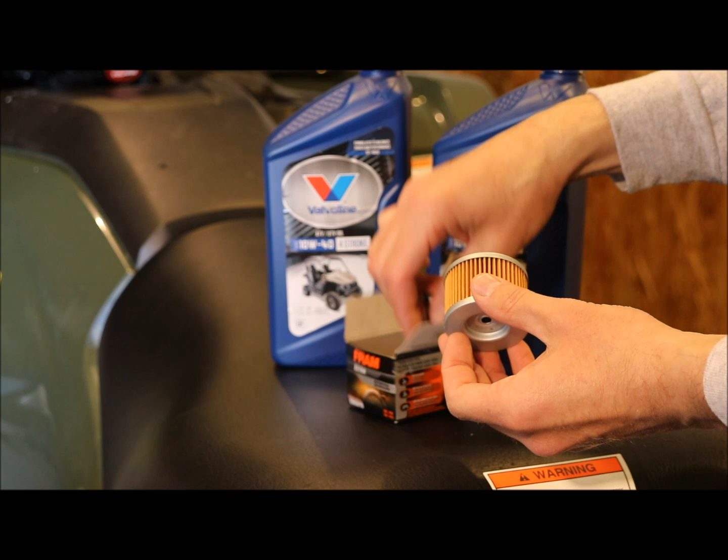I know this little tiny Fram filter here, this CH6015, was like $6. It says made in China. That's what the filter looks like, and it comes with the O-ring, which I'm assuming is for the cover that goes over this filter. I know you can get a K&N filter too for that setup, but those weren't easy to come by, so I didn't. I don't know if the K&N comes with the outer O-ring or not.

So yeah, let's start getting this thing tore apart.

Alright, so first thing I'm going to do, since it's been sitting out in that shipping container over the winter and I don't know how much the battery is charged, I'm going to pull the seat off and the back cover off and hook a charger up to it. The seat, there's just a little lever you lift up here, and that pops off.

Then to access the battery, let's see if you guys can see what I'm talking about. There's a little compartment back here, you're going to want to flip that up, and this comes down. This is your compartment, and then this area here just slides forward, and your battery's going to be right down in there. So let me go grab the charger and we'll get that hooked up.

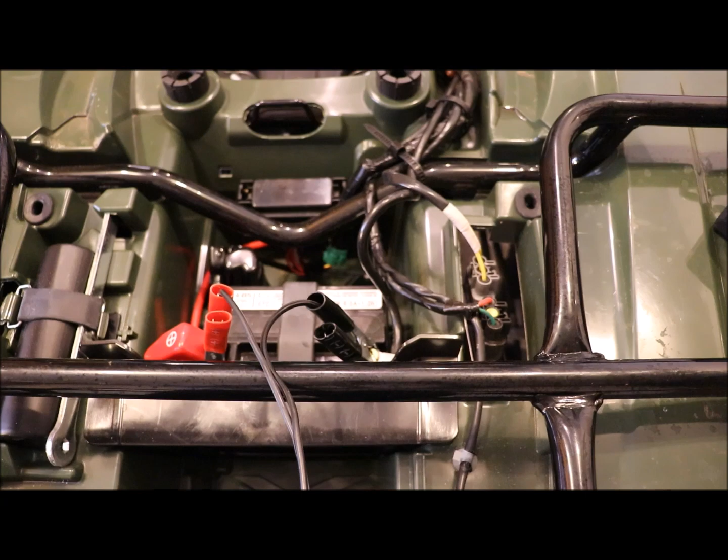So here's a better shot. You can see the battery is right down in there, and all I got on here is just a 1.5 charge, so it's taking charge right now. It's just a 1.5 amp slow charge or whatever. So we'll let that charge, and then we'll hop into the rest of it.

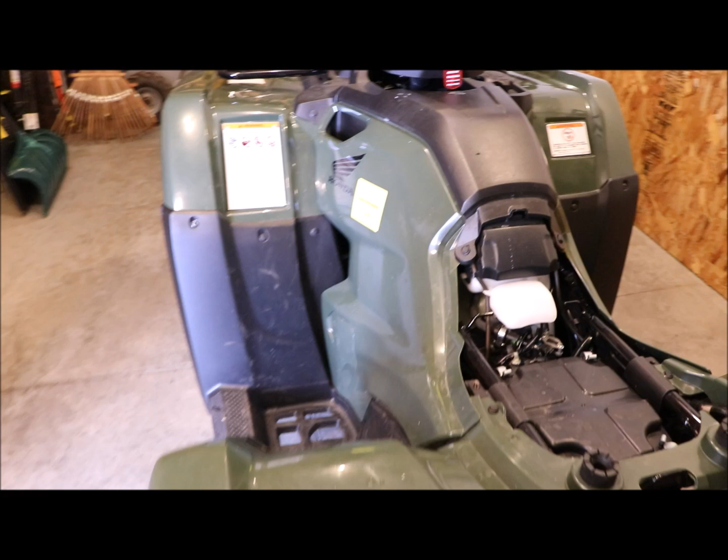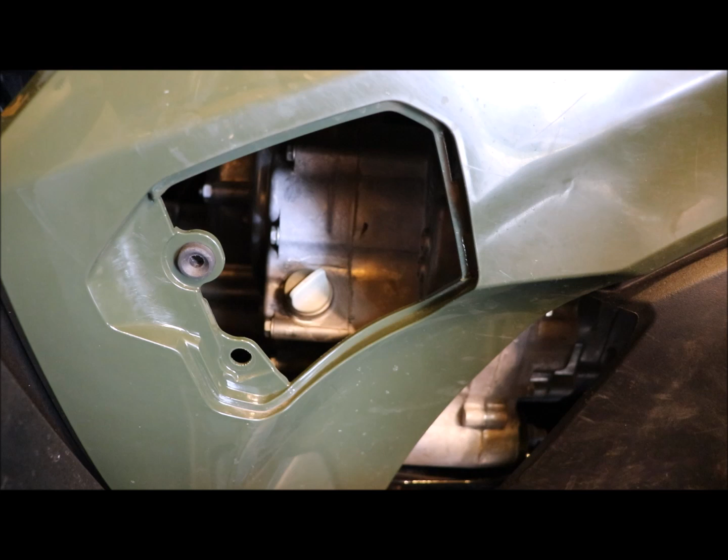I'm assuming to access the oil stuff, we're gonna have to pull these panels off. The engine is in there somewhere, and for checking the oil it has this little icon here on this cover that gets you to the dipstick and the fill. But yeah, I think we're gonna pull the covers off.

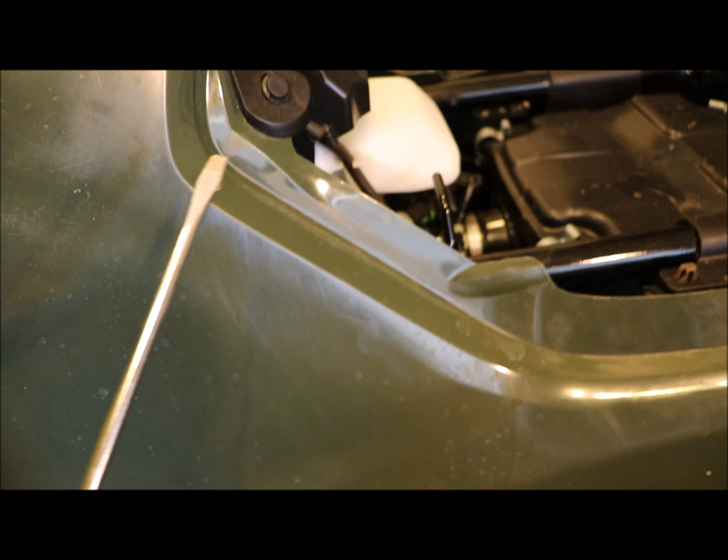Alright, so to pull the panel off, it looks like we're going to have this little clip here that we got to deal with. And what I'm using is just a straight blade screwdriver, a 3/16 tip. I'm just going to slide that underneath here and kind of work that clip up so that it releases.

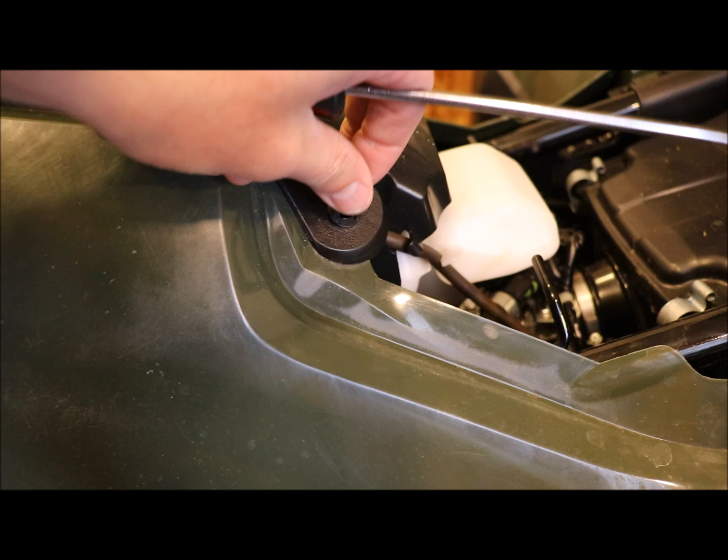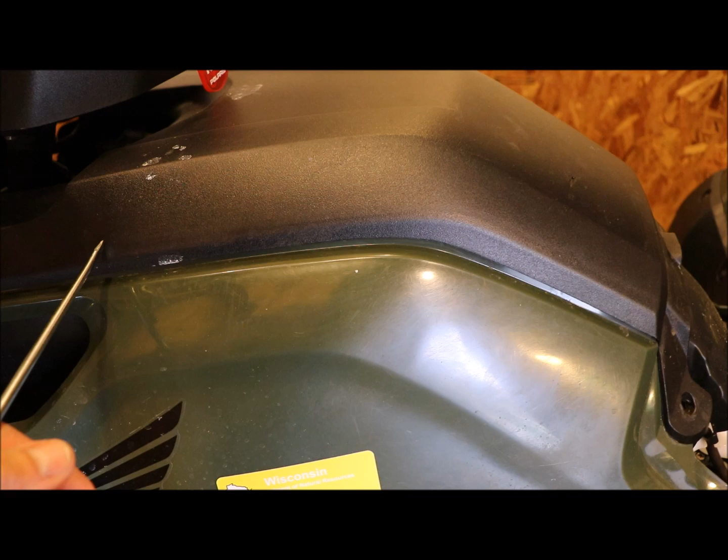But once it's up like that, it should just pull out together. There, that's what it should look like when you get it out. And then I don't know if this top panel just has push fasteners that you can pop up and then this comes out, or if this comes out all as one piece.

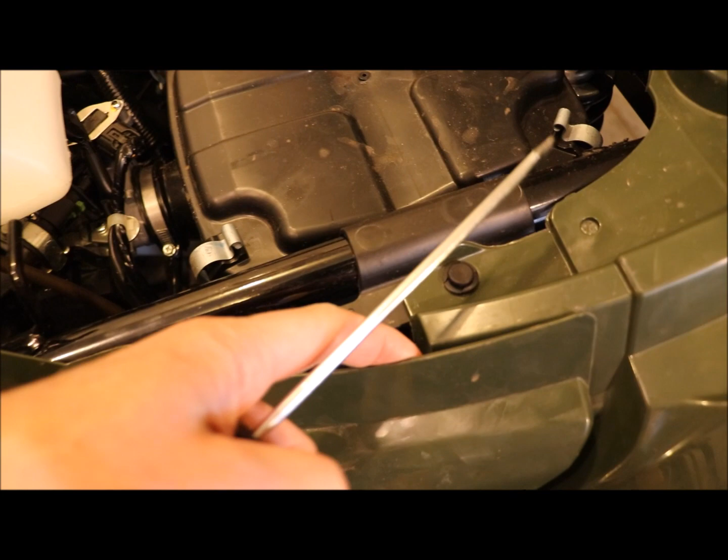Yeah, this one we won't need to take out because this is on the back side. So let me get the camera set up on the tripod here and we'll see if we can break something.

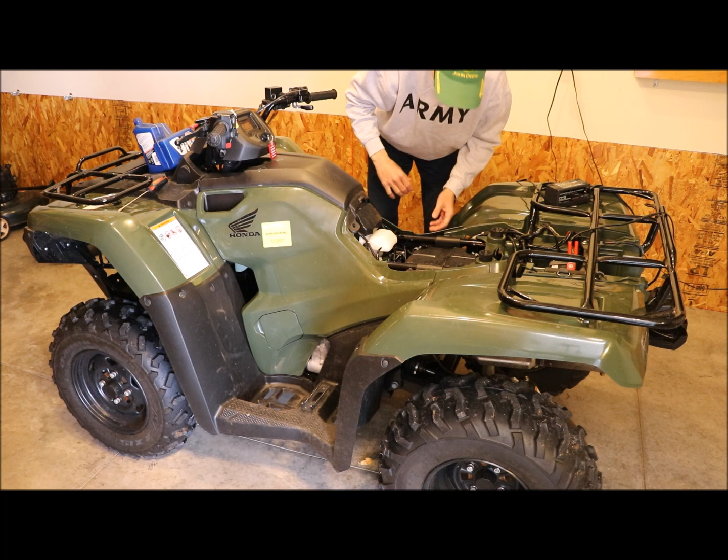Alright, so the way it looks, that top part doesn't come off. This looks like this whole assembly comes off together. And you can see down in here there's a tab that comes up, and then there's just some push fasteners, so I'm going to kind of pull on those. It seems like it's coming.

It's a good sign. Come back to this side, kind of the same thing. It's like a push fastener down right back there, and then there's a little tab that sticks up. We can see that once this is off.

That should be it then. So it looks like there's a push. Okay, so it's off. Yeah, so that's all one piece. This is one piece, you can't get this off.

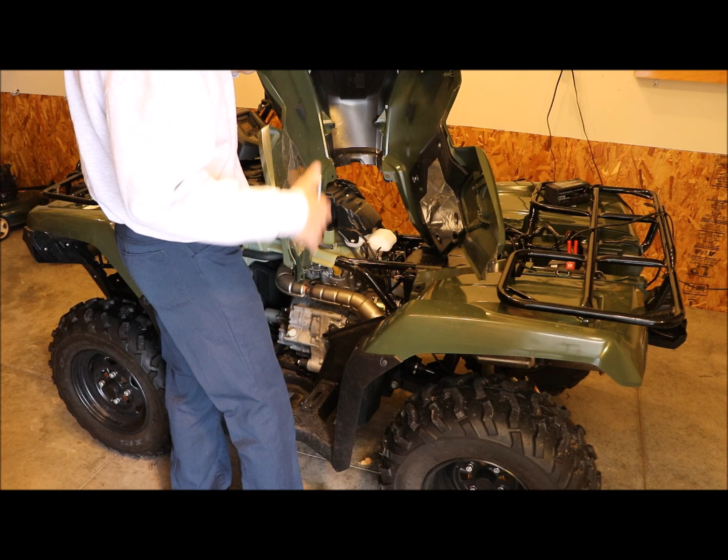I don't know if this is a different Honda design, if you can see it or not, but those same push fasteners are underneath here. There's no way of getting to that unless you pull the whole thing off. So you couldn't take it apart now, they've got it screwed in here. So that's how this is supposed to come off, all as one piece. I guess that's kind of a different design.

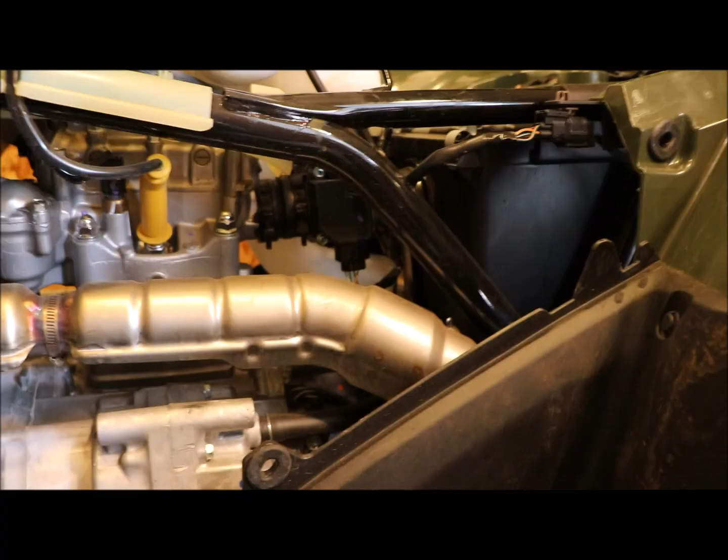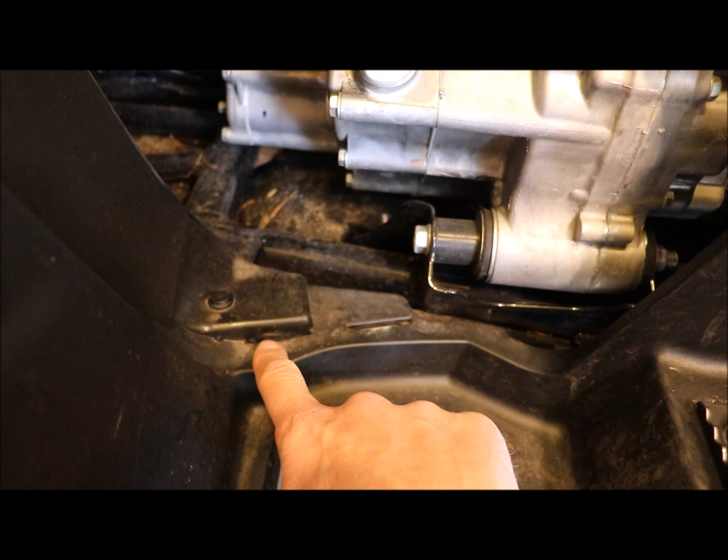So here's what I was talking about. There was a push one here. Here's where that tab comes up and there's like a slot that kind of holds that panel in. Run it down, there's another push in here. And then right in here there's some slots where these two tabs kind of hold in there. And this would be that top black cover.

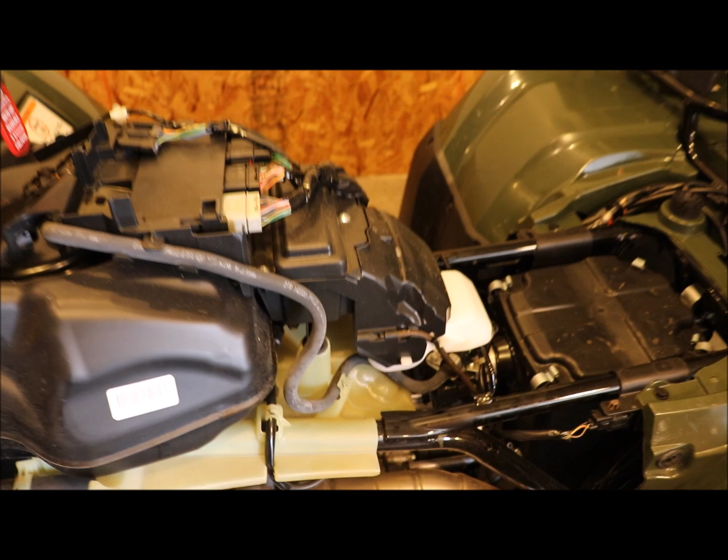There was a push pin here, and there's like an alignment tab up on top, and I think that's it. Yeah, and it's the same thing on the other side, you get the same amount of fasteners. So, yeah.

I don't know, I washed this off the other day trying to clean it up, but I didn't have these panels off. And you can kind of see there's some sand and dirt in there, but as long as we don't get any of that in our oil, we should be all right.

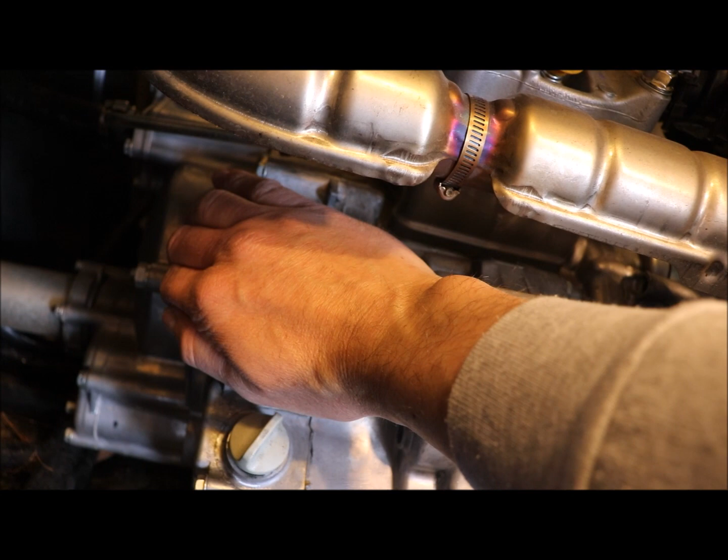So, yeah, I don't know, we can kind of crack this open. I always like to open these up so that it has maximum flow, and it is popping because I did run it, so it's warm, so that the oil drains quickly.

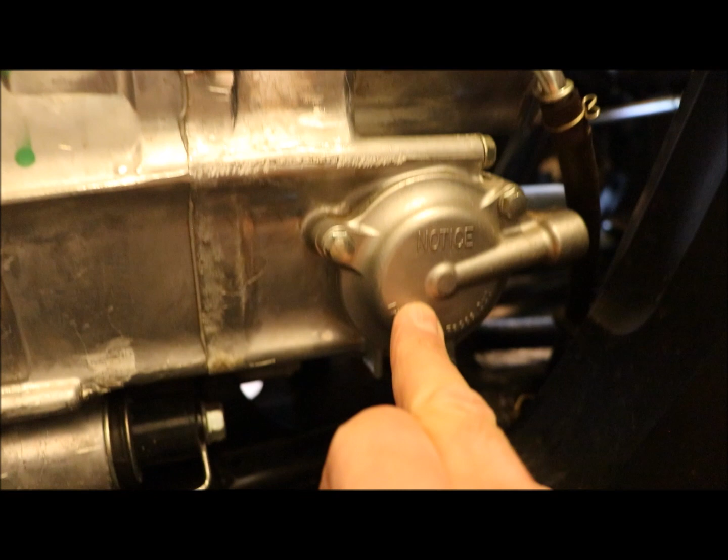Alright, so if you'd have it the passenger side here, this is going to be where your oil filter is, right in here. And this says 'notice filter seal faces out.' I don't know what that means. Well, I guess we'll know once we take it out.

But boy, this looks like a pretty simplistic machine here, doesn't it? There's not much to it. This is your transmission here, and then the engine sits on top. It's all one compact little unit here.

So I know that the air filter or filtration system here, it must grab the air from I don't know where. It obviously comes through this tube, and they must have it set up high enough so that if you are fording through some water or something, you don't get water in your system. I'm not sure exactly where that intake comes from though, where it's getting it.

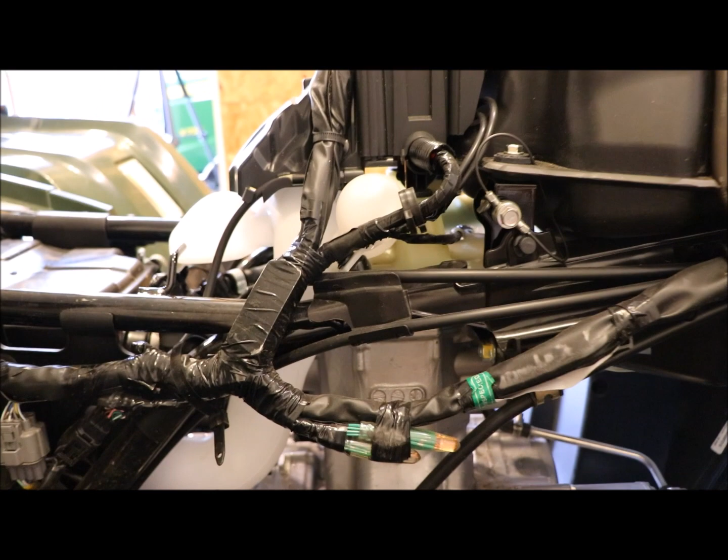But alright, let me grab some tools here. Alright, so like anything, this is always really hard to show unless you have it up on a lift or something.

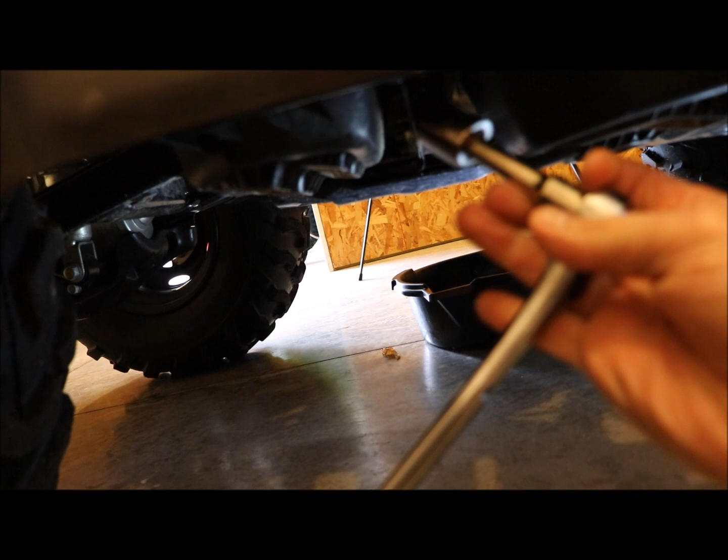You're going to need a 17mm socket. I'm just using a small 3/8 drive because there's only supposed to be, I think, 18 foot-pounds on there. Now granted, it always seems like when it comes from the factory it's pretty snug.

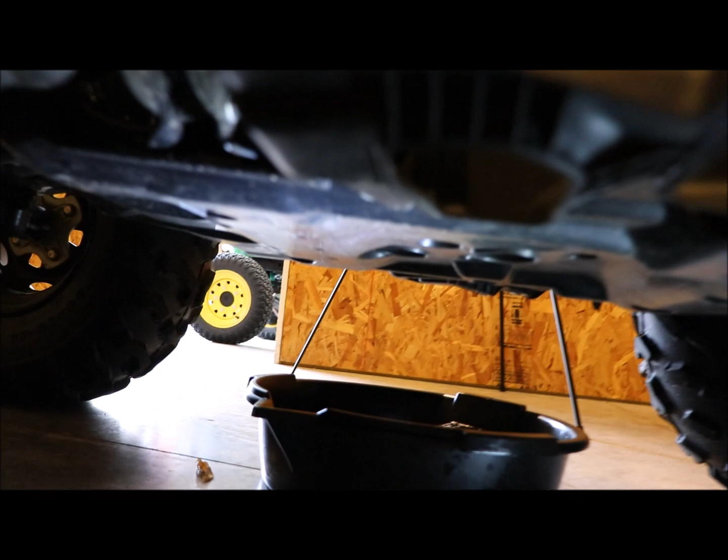So, to show you where it is, you've got a couple holes underneath here. This hole here is going to be where your plug is. Hopefully you can see this because I can't even see with the camera what I'm showing you right now. There should be a plug there, that's what we're going to pull out. So I'll bring this back and then see if we can get this oil dropped.

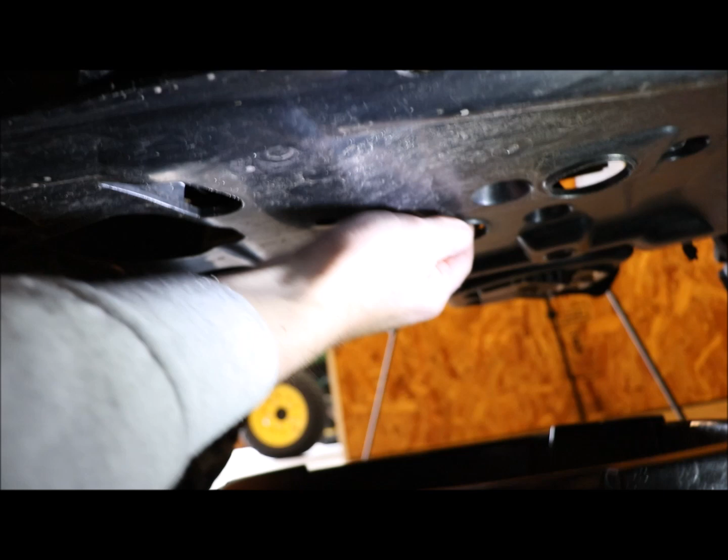Alright, so I got it cracked loose. It was relatively not tight, so it was pretty good. And there's going to be no good way of not getting oil all over your hands doing this, because there's zero room in here.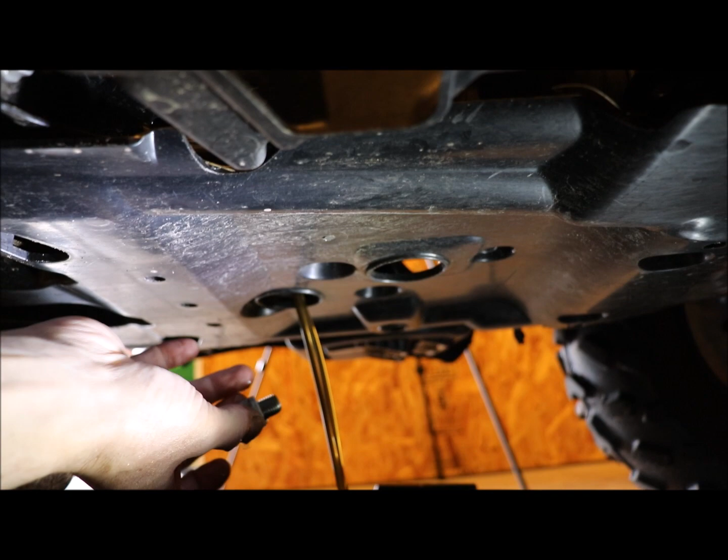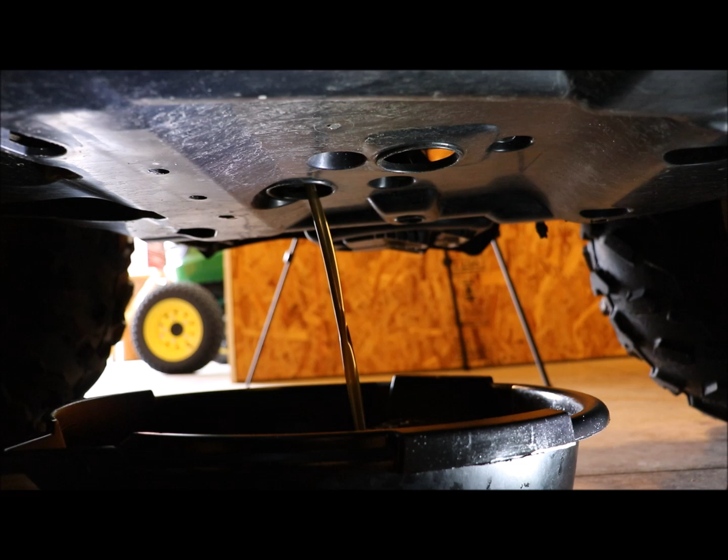I think there's a sealing washer on this as well. Oh, that oil looks like brand new yet. I guess that's good. Oh yeah, there's a little aluminum washer on there, the way it looks. So we're gonna let that drain. Oops, there you go. Well, that's good.

Alright, I'll let that go and then we'll go from there. So you probably won't believe this, but I guessed both sizes here. For the drain plug, I guessed it was a 17 just by feeling it. And then these here, I took a look at them, went over to my small set, using a 1/4 inch drive to kind of be the right size for the fastener. I was like, well, it's not a 10, even though 10 is pretty common. I'm gonna guess an 8 because it's either 8 or 10. They usually don't use 9, and that's what it is. So this is just the 8mm.

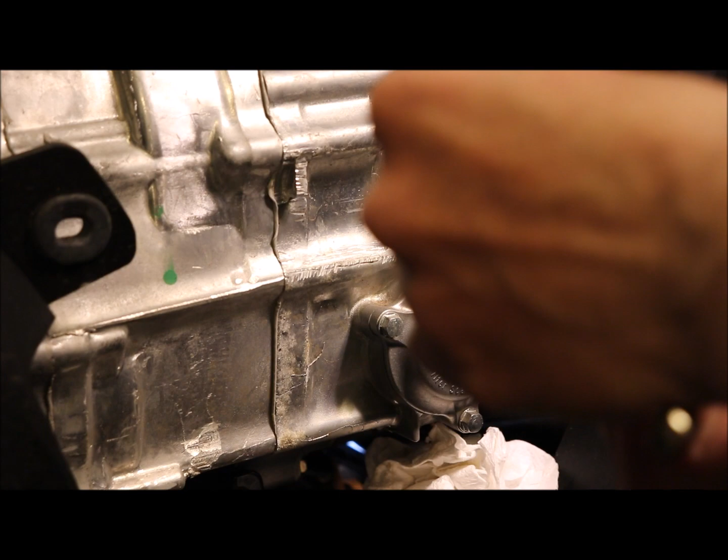I put down some paper towel because there's no hole here, and it looks like once you pull this off, you're gonna have an oily mess. So I don't know what the torque is on these, but I can't imagine them being too tight because this is in aluminum. That's probably why they have a torque spec on everything in the book, because if you over torque it, you're just going to strip that aluminum out. It's a pretty long bolt.

Alright, moment of truth here. Or not. Oh! Yes, definitely oil. This side and spring towards engine. Alright, so there's a little spring in there. That's good to know. There's an O-ring on the case here.

Yeah, I don't know, the oil in the filter here looks kind of black or almost green. So we'll kind of inspect this filter and look at the Fram equivalent to see how it stacks up.

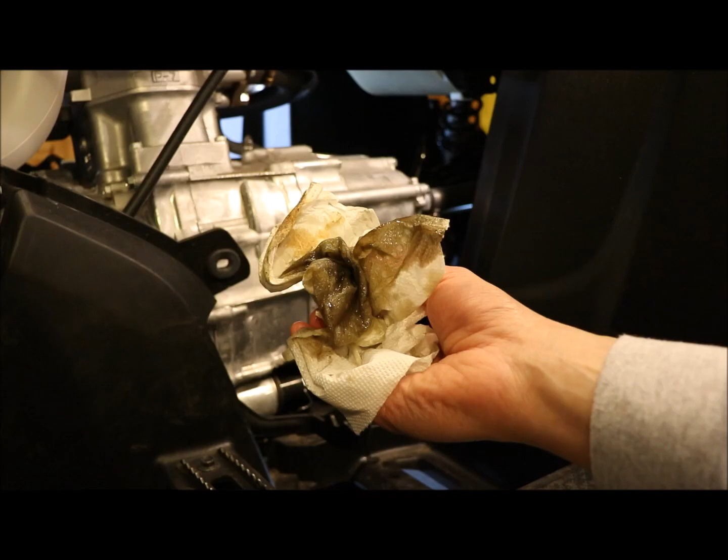So while you pull that oil filter out, I would definitely leave the drain plug open, because as soon as I pulled it out, there was a bunch more oil that came out. I've seen a video where someone drained the oil from the pan, put the plug back in, and then went to the oil filter. I wouldn't do it that way. I would leave your plug open the whole time that you're pulling out your oil filter.

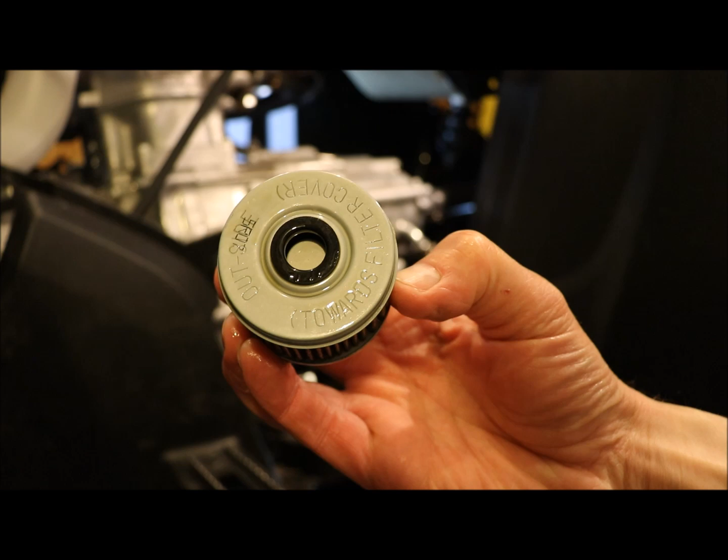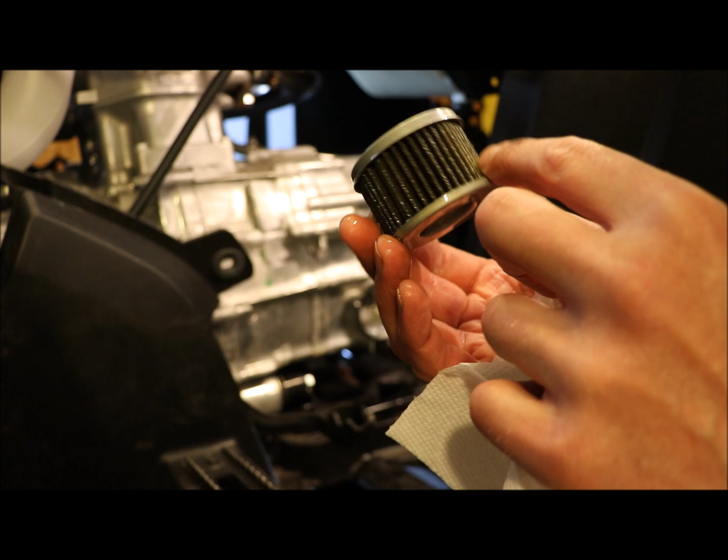Anyway, you can kind of see it's more of a greenish color. And here's what the filter looks like. It's got some writing on it - toward filter cover outside, toward engine side. Yeah, I don't know, I don't see any metal or anything like that. I'm assuming because the transmission uses the same oil as the engine, you probably have some break-in, and that's why they want it changed with the transmission or whatever.

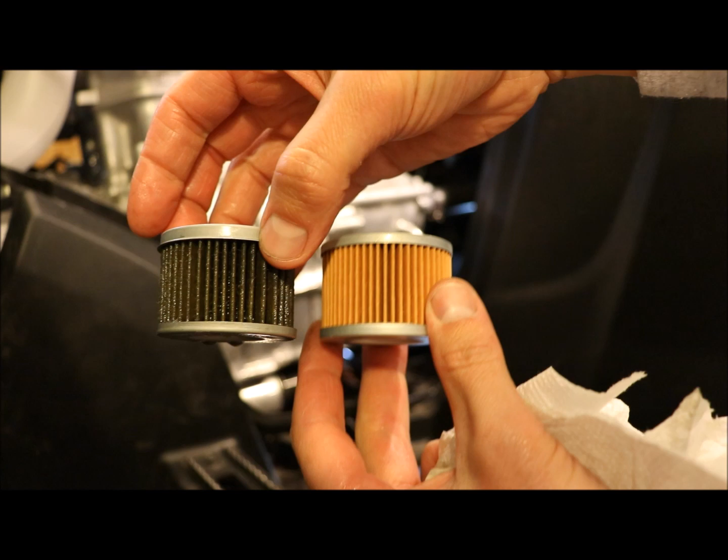So here is the new Fram filter. If you look at the pleats, they look about the same. Oops. All right, oh come on. Actually, the Fram almost looks like it has more pleats. I don't know what the actual filter media is made of, the actual material, but definitely just as many pleats.

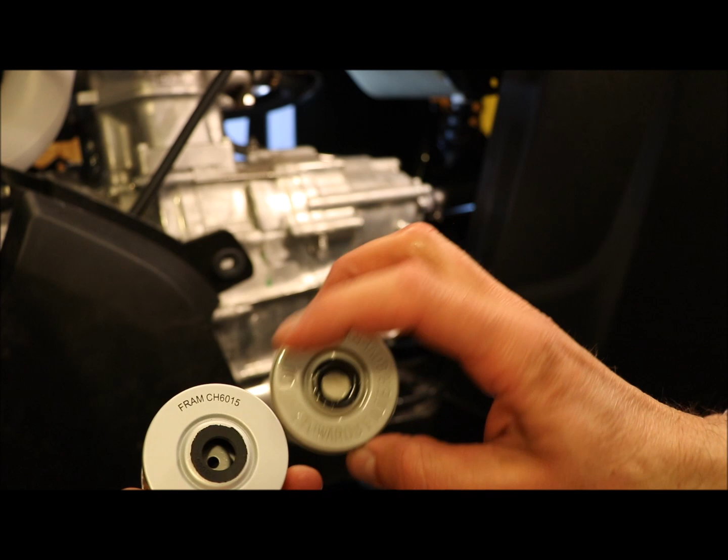Fram does not have marked which side goes in and which side goes out, but as long as you look at your old filter, that'll get you a pretty good idea. The Honda filter here has like a little metal in here. This is rubber. Oops. Fram has a hole in the middle here. This one does not.

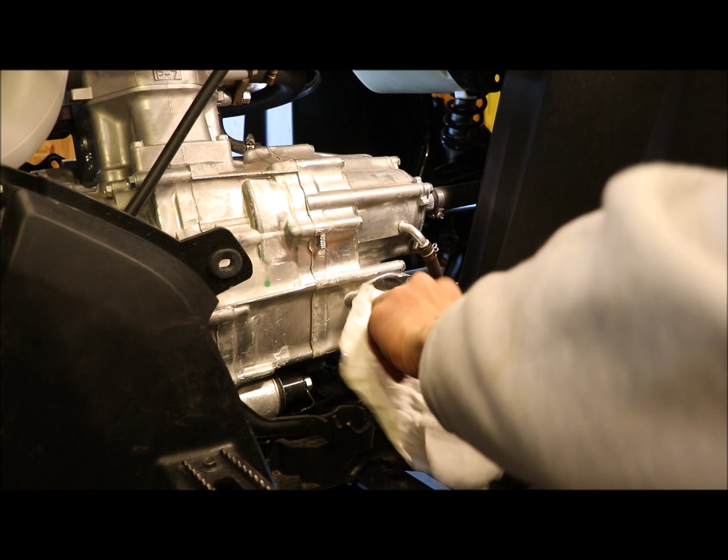I don't really think that's that big of a deal. I know a lot of people get bent out of shape about filters, but they're all in business to do something - to sell filters, right? So I don't know why there'd be any reason to pull this spring out if it's in there. And if you do pull it out, I'd probably make sure that you put it back in the same orientation that you took it out, not flip it. I don't think that that's that big of a deal. It looks like it just keeps pressure on the filter outward.

There must be a hole in here. Yeah, there's a hole towards the back here. So this must be kind of like your supply here where the pump is maybe, and it comes through here, and then the hole goes towards the back of the transmission here.

So, and then I got this. Can I just dump this? So, and then this is your filter cover.

The oil is definitely green. I mean, the stuff came out of the pan looks good, but this stuff definitely, it's almost like a hydraulic oil. It looks so green.

Weird. So, there's an O-ring on here. I don't know why you couldn't reuse this O-ring that's on the cover here. I think the Honda ones come with this little oil O-ring here and this one, and that's probably why the filter is more expensive, because you're getting those O-rings.

I would imagine over time you may have issue with it, but for this first oil change, I don't think it's that big of a deal. Like I said, I don't think the K&N filter even comes with any O-rings, and K&N is usually your top of the line performance filter.

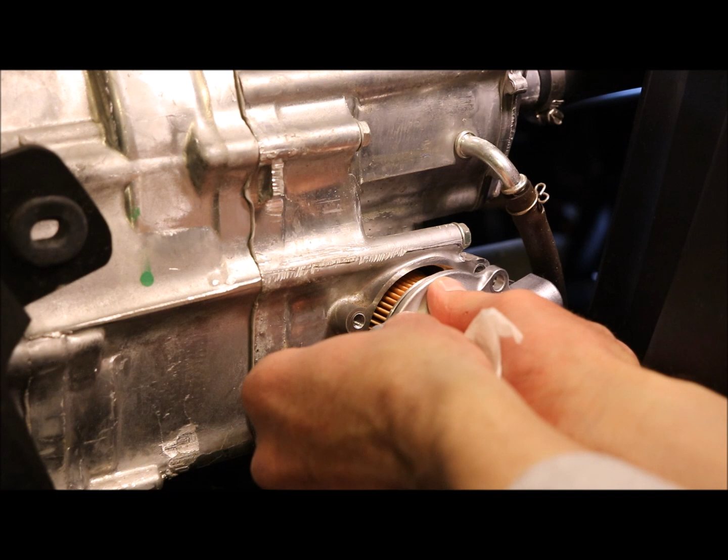This is the filter seal, and then the spring is gonna make contact with that. So you just wanna make sure that's in there, and probably make sure that spring doesn't fall down. That spring should self-center.

There we go. That Fram O-ring definitely felt a little thicker than the Honda one. And we should be into place here. Maybe not. Well, we gotta be pretty close. Maybe just a little bit.

There we go. So it takes just a little bit of effort to push this filter cover in. It would be nice if they used just like a regular canister filter. I know we have, I think, two trucks at work that use these paper filters for the oil.

And it's time consuming. It's not as nice, and it seems to be a little messier when trying to get it out, because you're pulling it from the top of the engine to get it out.

Now, I kind of want to get one of these down so that this doesn't pop back out here. Let's see if we can get this one in here.

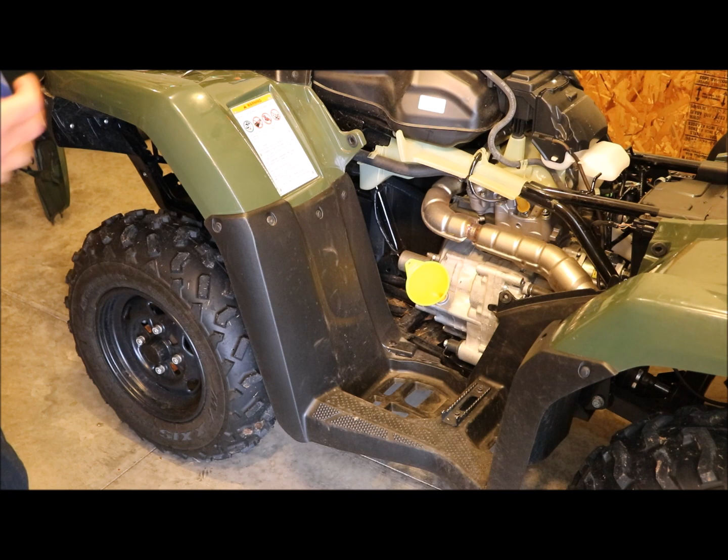So, alright, let's get the drain plug back in and then we'll start filling this thing up. Alright, so I just got the plug put back in and we should be good to go. With the plug, I don't have a 3/8 torque wrench, so I couldn't torque it. My 1/2 inch only goes down to 25 foot-pounds. So basically, I turned the plug up until it made contact, so I couldn't turn it by hand.

Then I put the wrench or ratchet on it, and just moved it a little bit, and that was it. I didn't try to go a quarter or even an eighth of a turn. That's too much, at 18 foot-pounds.

Same thing with the little bolts or machine screws on the other side. Those are 8 foot-pounds with a little tiny quarter drive. Once they make contact, just try to move them. That's probably enough. Better to keep them a little loose than too tight, and just kind of keep an eye on them.

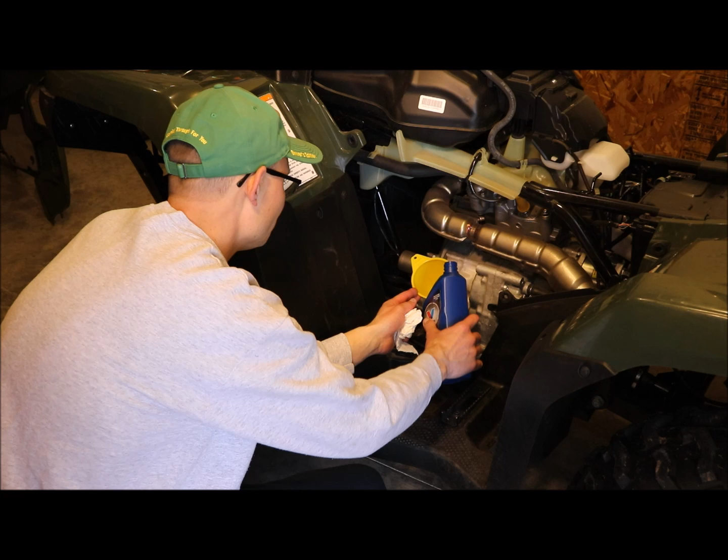So like I said, this is 10W40 4-stroke ATV/UTV Valvoline oil. That's the right specification, and we're just gonna fill this thing up and hopefully it'll work after we get it all done here.

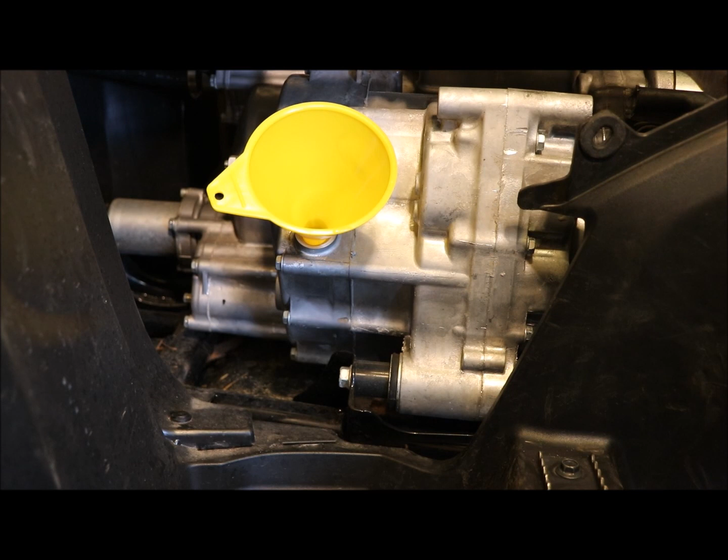Alright, so I kind of haphazardly dumped those 3 quarts in. I didn't try to get every last drop out of each quart since it only takes 2.9, so that should be pretty close. I'll let what's left in the funnel drain down since it's a thicker oil. Then we're supposed to run it for 5-10 minutes and let it sit before checking it. We'll do that whole procedure in a second.

I'm gonna get the thing buttoned back up. I'll put the shields back on, and then we'll run it a little bit and go from there.

Alright, so I got it all, well, mostly buttoned up, the side shields. What you may want to do is double check before you take anything off, like what type of gap you have here, because now it looks like this isn't sitting down far enough. But it can't come down any further because of those pins. Maybe that's just how it was.

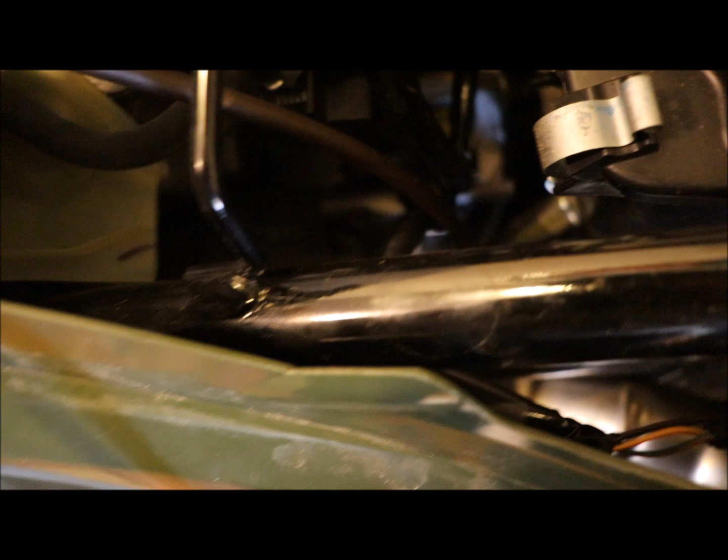I know the top ones are in, and to see that one back down in here, it's really hard. You got to take a flashlight and use 2 hands to come up from the bottom and the top to hold and line this up, because these panels are flexible. Same thing with the one back here, and that tab that sticks up goes in that slot. You can kind of see it down there. That's kind of a pain too.

So both sides kind of look the same, so either I got it wrong or that's the way it was. There's a gap down here too on this one where those tabs stick through the slots. It's in, but I can't get it to come down any more than that. Maybe that's just the way it is.

This was a pretty cheap 4-wheeler in the grand scheme of things when you're looking at ATVs and whatever. Now they're what I'd consider the price of a new car, but this one was very economical.

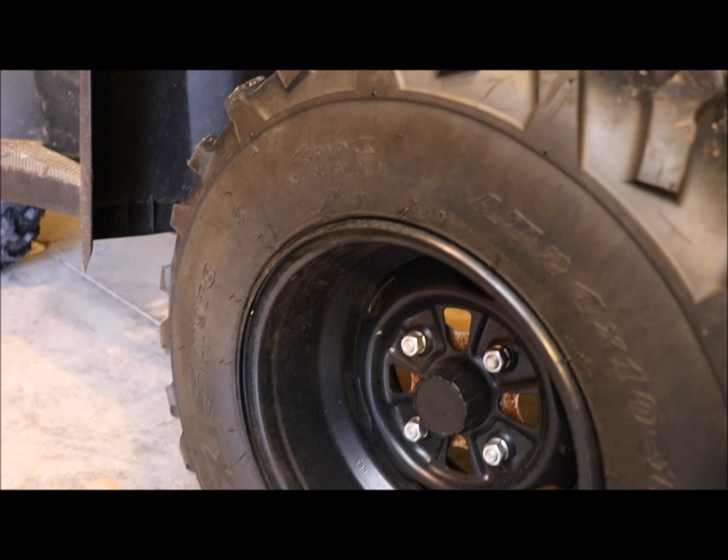So the tires too, I was going to check the air on those. Those are supposed to be like 4.7. What's unique about this tire is it doesn't say anywhere how much air pressure it's supposed to have. It gives you a maximum - do not inflate beyond 35 PSI when seating the bead. So it gives you that, but it doesn't tell you how much the tire is supposed to hold. So it's either 4.5 or 4.7 PSI. It's not much, and they give you a special gauge, because I don't think my automotive gauge goes down that low. Maybe it does, but that's kind of an odd amount.

So luckily they give you some of those, I don't know if you'd call them specialty tools, to check that stuff. I'm surprised my battery's not fully charged yet - it's still on the yellow. It goes to green once it's fully charged. So I think we'll set it up.

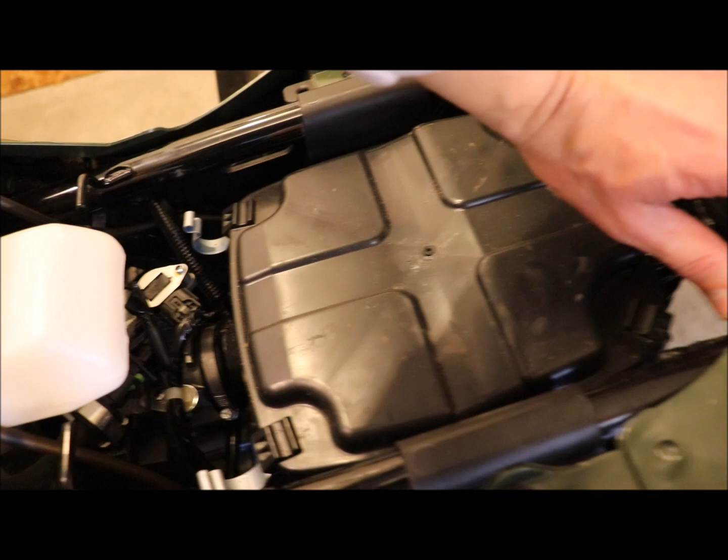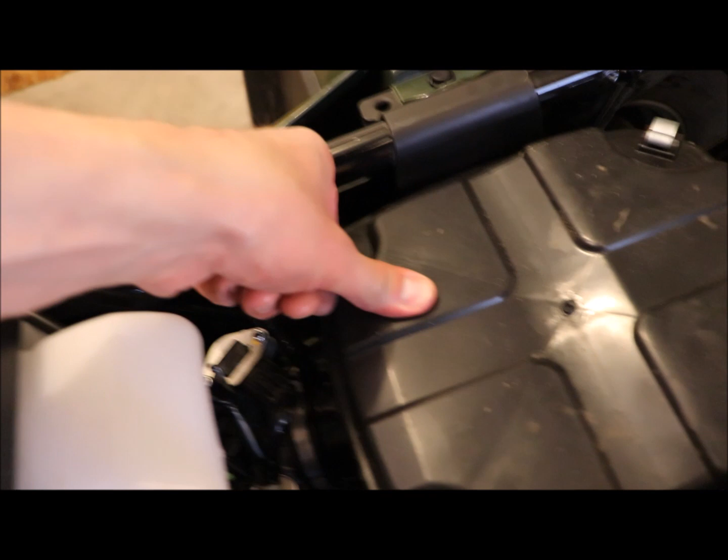Actually, we can check the air filter since we're here. There should be really nothing wrong with this since there's only 20 hours on it, very few miles. So that's what your filter looks like - I think it's a pre-oiled type filter, looks like there's some oil on it. Yeah, that looks fine, I don't think there's anything wrong with that. It's easy enough to get to by taking the seat off - probably the easiest thing to check on this thing is the air filter.

Alright, let me get the camera on the tripod and then we'll start this thing up. Alright, so we'll key it up here.

I don't know if there's an oil gauge on there. It looks like there's a check engine and a temperature gauge. You can see on the display to the right of the 0 there's a little wrench - we'll have to figure out how to reset that. That's basically an internal timer for your maintenance or whatever. So alright, let's give it a start here.

I don't know, seems like it's fine. It doesn't seem to lurch as hard as it did before. When you put it in either forward or reverse, the thing would really want to lurch ahead. I don't know, maybe that's the 10W40 oil compared to whatever they had in there.

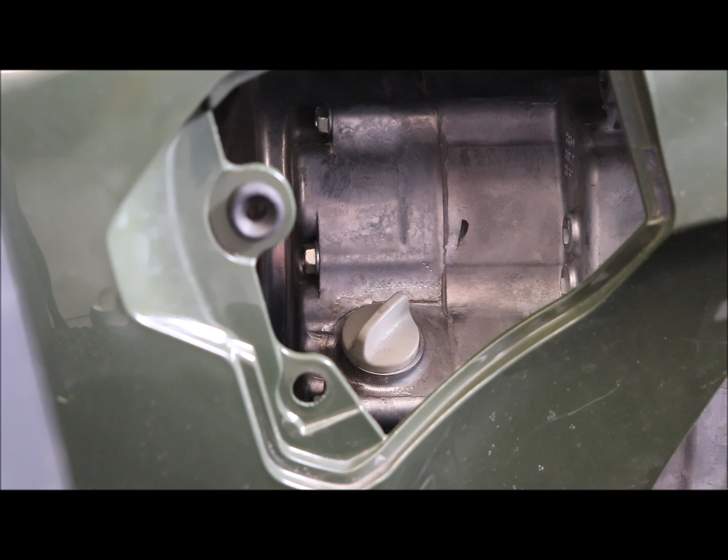Okay, so the procedure for checking the oil, anytime you want to check it, says to let it idle, not drive, idle for 3 to 5 minutes. If the temperature is below 50 degrees, let it idle for 10 minutes. Then shut it off and wait 2 to 3 minutes. Then remove the dipstick, wipe it clean, and put the dipstick back in without turning it on the threads.

So I'm kind of impatient here, I haven't waited the 2 to 3 minutes, and this engine is definitely warm because I've been riding it around. So I'm just going to wipe it clean here. It's going to be really hard to see because this oil is very, very clear. Kind of dip it back in again.

Yeah, it looks good. It looks like it might not be all the way to the top of the crosshatch, but if it's warm and that oil is coming from the top of the engine down back into the pan, it's probably alright, so I wouldn't worry about it. I think we're good that way. I can check it at a later date too, so I can throw this cover back on.

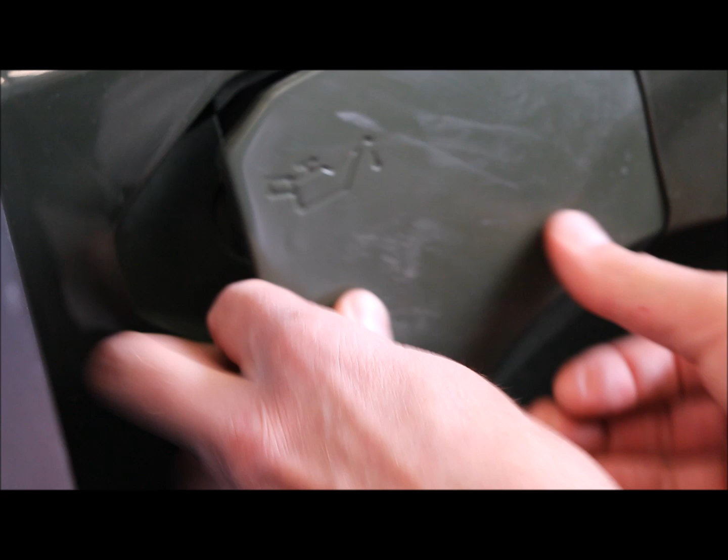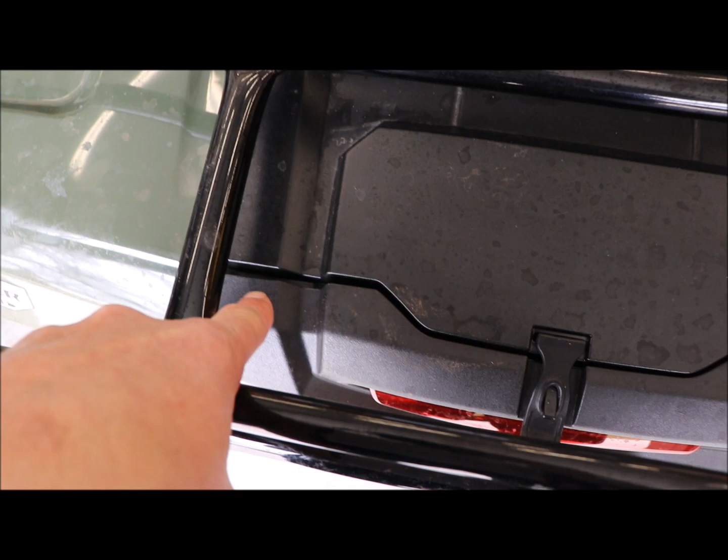Also, I did check some other panels on this thing, and that's just the way it is. The fit and finish on this thing isn't so good, because when I put this back panel back in, you can see there's a huge gap here, and here it's tighter, and this doesn't come back any further than what it does. It's a toy, so that's kind of the way it is.

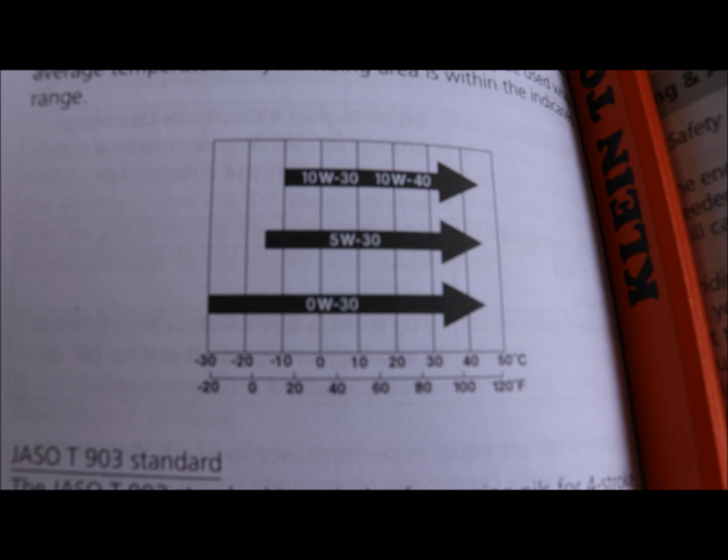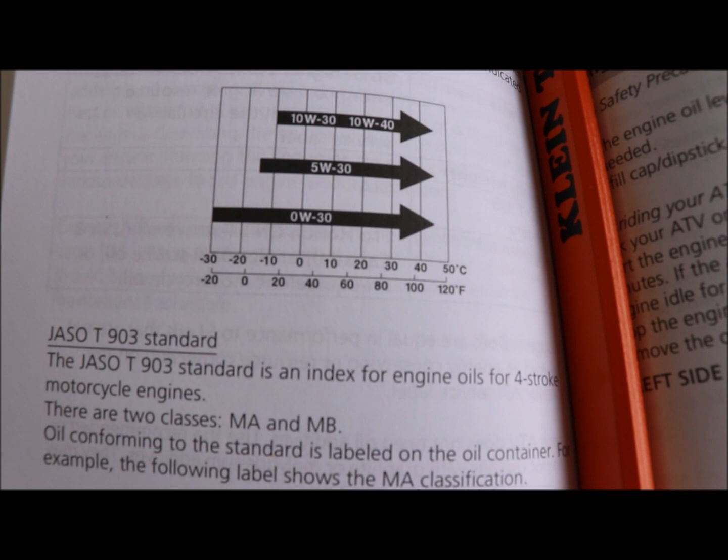A couple things in the book here. It shows you the oil specifications, and it says somewhere that 10W30 is what's recommended. I don't know where I saw that written in here, but it shows the different grades. So 0W30 must be the synthetic, 5W30 can be used, and then 10W30, 10W40 is at the top of the scale. So if I get into that -10 temperature, I should probably switch oil.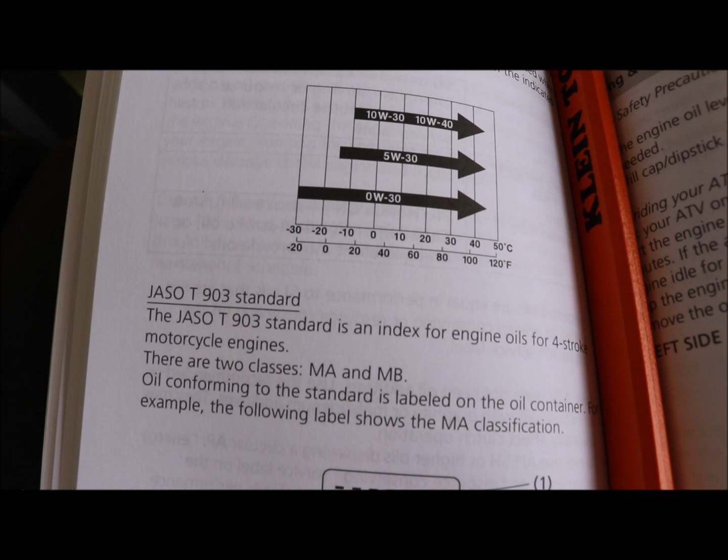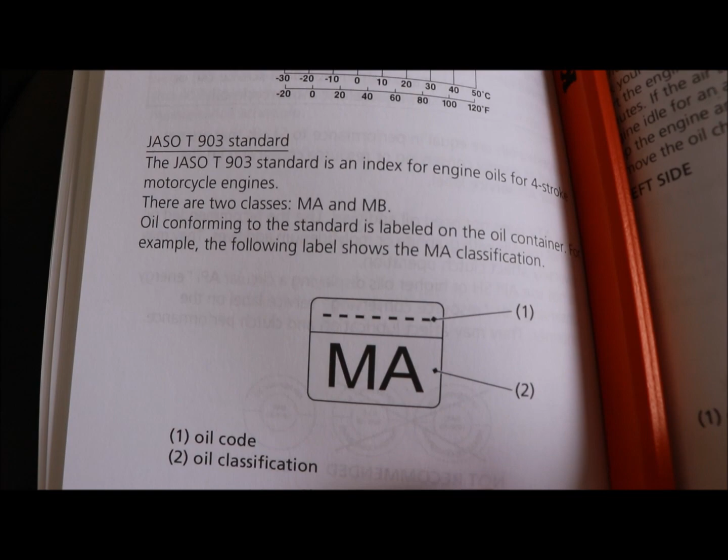That would probably help it crank a little quicker. Maybe that's why it wouldn't start during the winter months. And then there's that JASO T903 standard, and MA is the type of oil that I got. It's got to be that because it uses those wet clutches, or a wet clutch setup.

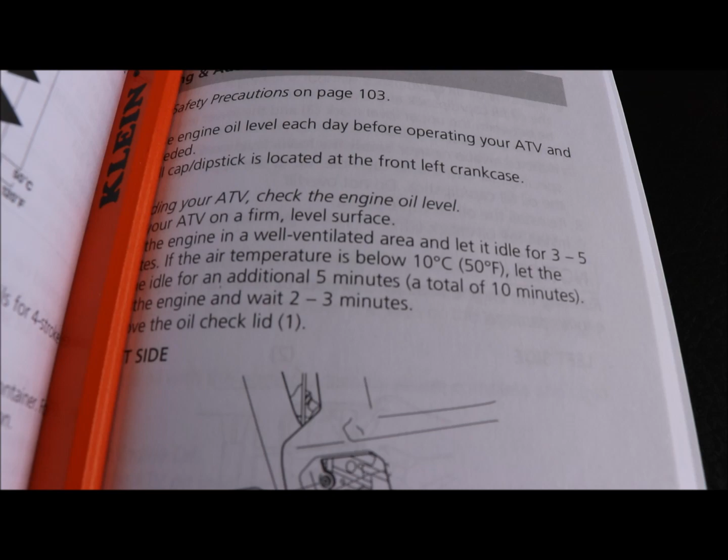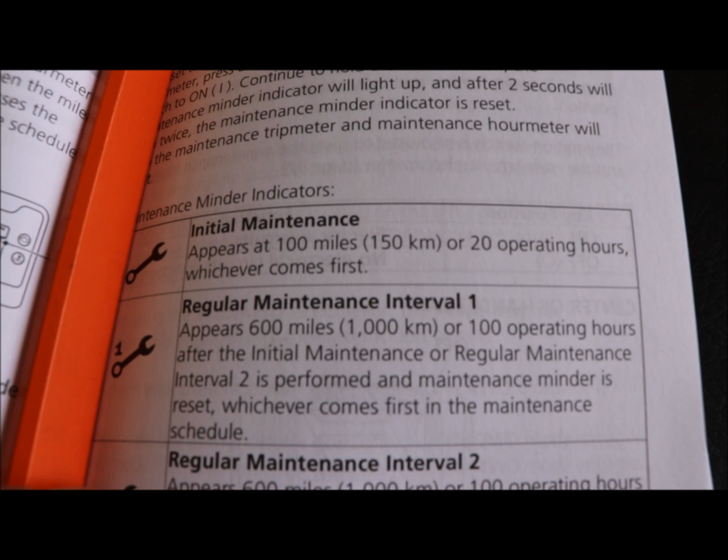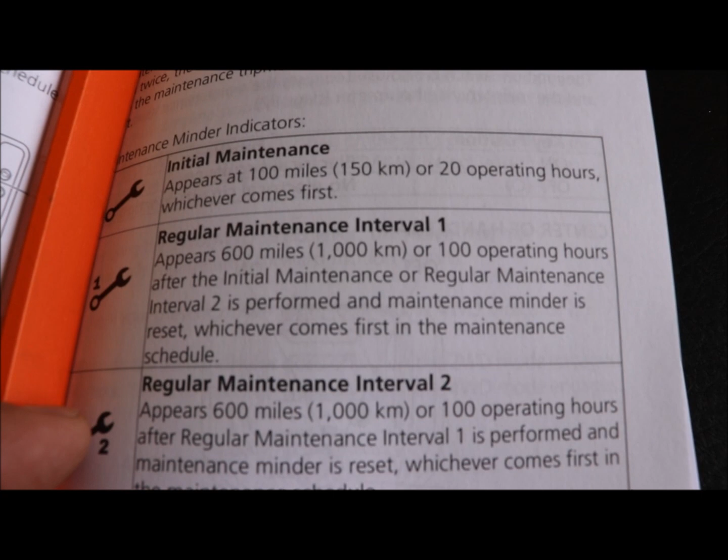This is just the procedure about checking the oil or whatever. And then here's the initial maintenance and the maintenance interval setup. So the first time it's going to go off is 100 miles or 20 operating hours, whichever comes first. Then it resets itself, and it's every 600 miles or 100 operating hours. I think it's based on time too, probably like once a year if you don't hit one of those two.

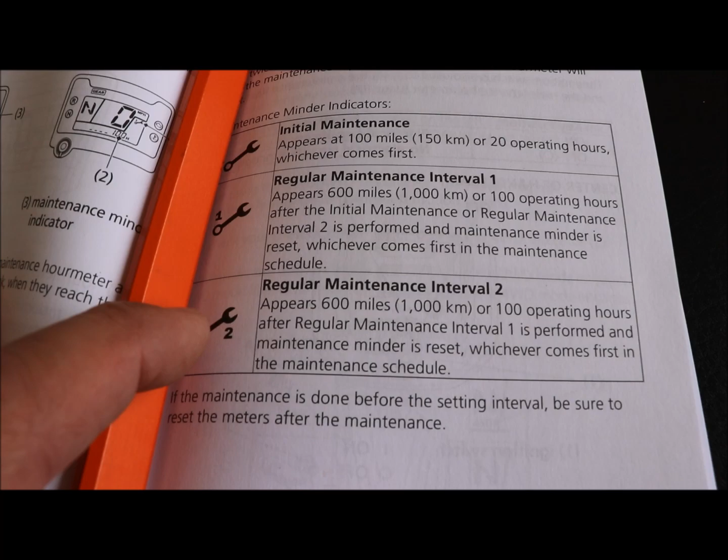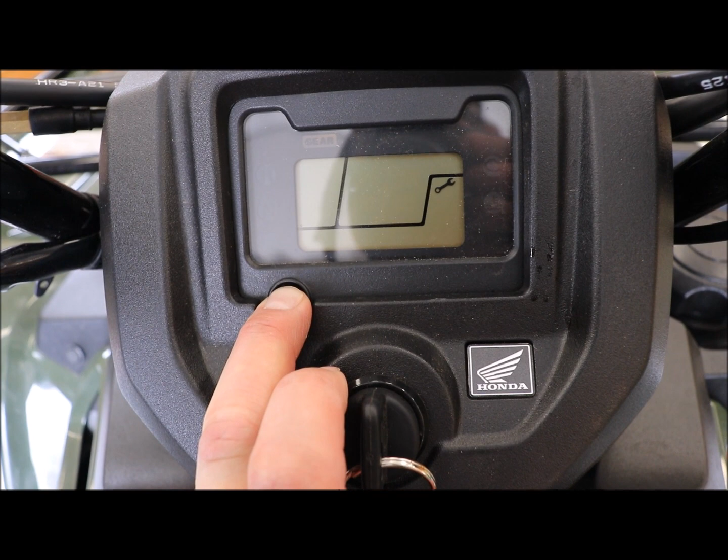Yeah, looks like it, so we're gonna reset that little wrench. To reset it, it says we're gonna hold this button down while we turn the key on. Keep holding, it's gonna flash or something and it should be off. Oh, that was it, well that's easy. So it flashes twice, I guess, and then it goes off.

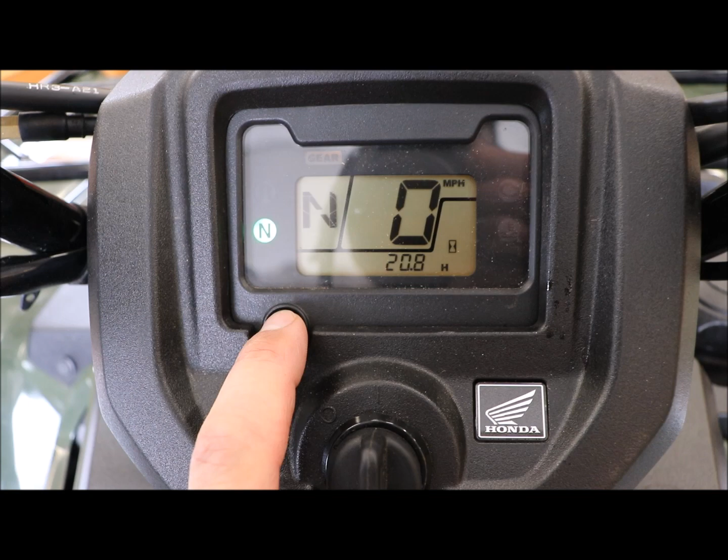I'm gonna scroll through here the rest of the stuff. So yeah, it's only got 71 miles on it. That's our temperature. And we got 20.8 hours. Oh, that's 600 miles to our next maintenance there. It's got the little one by the wrench, 100 hours. So yeah.

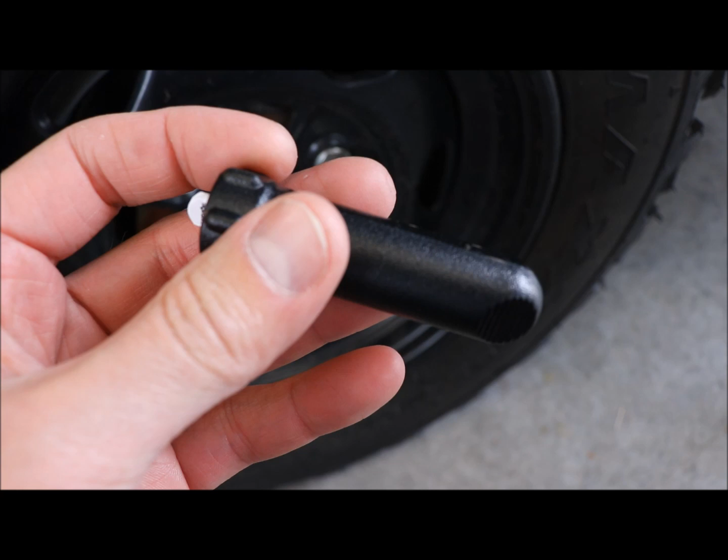Okay, so one last thing, I'm not going to take the tires off or anything like that and rotate, just because there's not enough hours on it. But this is the little gauge they give you for checking the air pressure. We're just going to put that on and see what we get here.

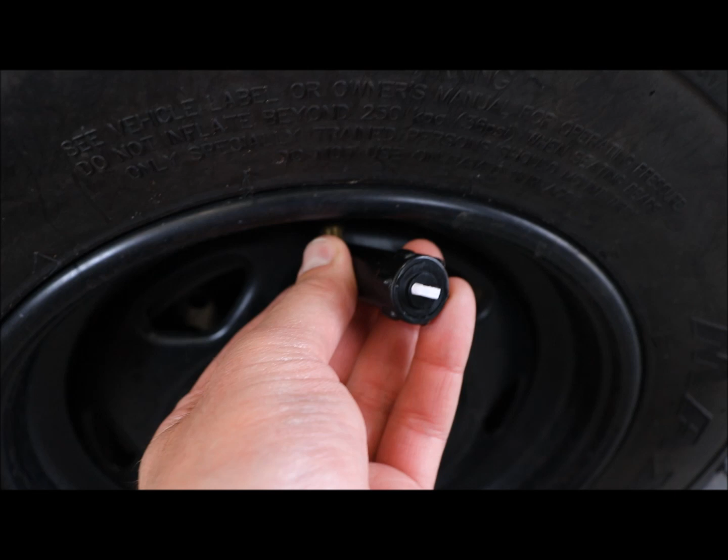I don't know if we can get it to go without leaking here. Alright, so there's the pressure gauge. You can tell it looks like it's at 4 psi, so it needs another half a psi to be where it needs to be. So I'll do that, and then that should be it with this.

That's going to be the oil change here, and this is your 2016 Rancher 420 ES ATV.